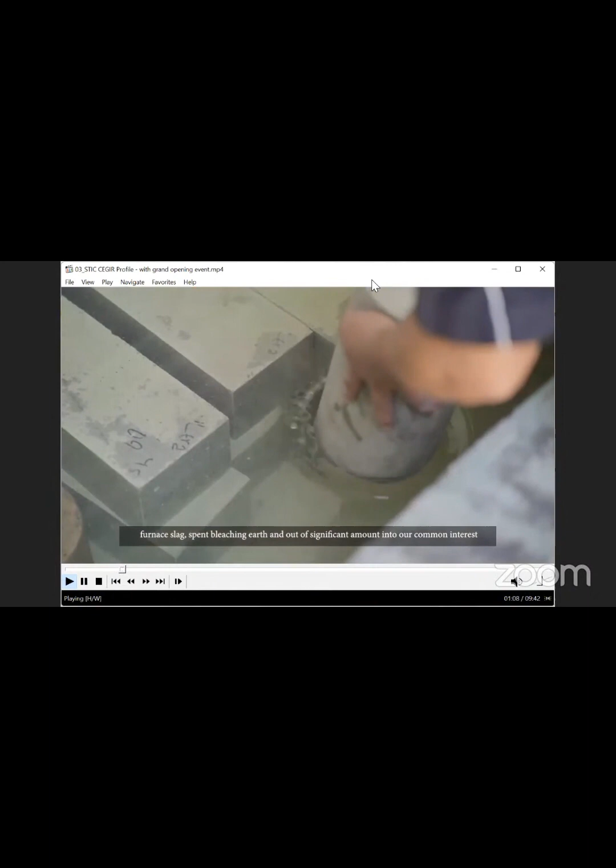The center is set up among Taiwan Tech, ITS, and Widya Mandala Catholic University, Surabaya. The main goal of the center is to strengthen cooperation on science and technology between Indonesia and Taiwan, and we will focus on recycle and reuse of industrial waste. Targeted compounds include fly ash, furnace slag, and spent bleaching earth that are of significant amount and to our common interest. It will also involve 1,400 strong alumni in Indonesia, and we will engage private sectors, NPOs, and research institutes.

Through this international collaboration, Institut Teknologi Sepuluh Nopember could strengthen the collaboration between National Taiwan University of Science and Technology, Widya Mandala Catholic University, and Indonesian Institute of Science. This research center was developed as a platform to connect the researchers from different universities from ITS, Widya Mandala, LIPI, and NTUST with the experts from industry that work together to have the research regarding the eco-green solution and for the circular economy and sustainability.

Waste utilization is one of the implementations of eco-green solution, and we know that Indonesia could develop this model to recover the waste and use it for many different purposes, and also we can develop a good impact to the environment and also to the society.

We are proud that ITS, the Institut Teknologi Sepuluh Nopember, Surabaya, Indonesia, has been a part of this prestigious international collaboration. The topic of circular economy and green innovative resource matches with the ITS vision and the world focus. So I believe that the research center opens opportunities for researchers to expand the outcome, the connection, and also the international collaborations. In addition, it boosts the ITS contributions to the nation.

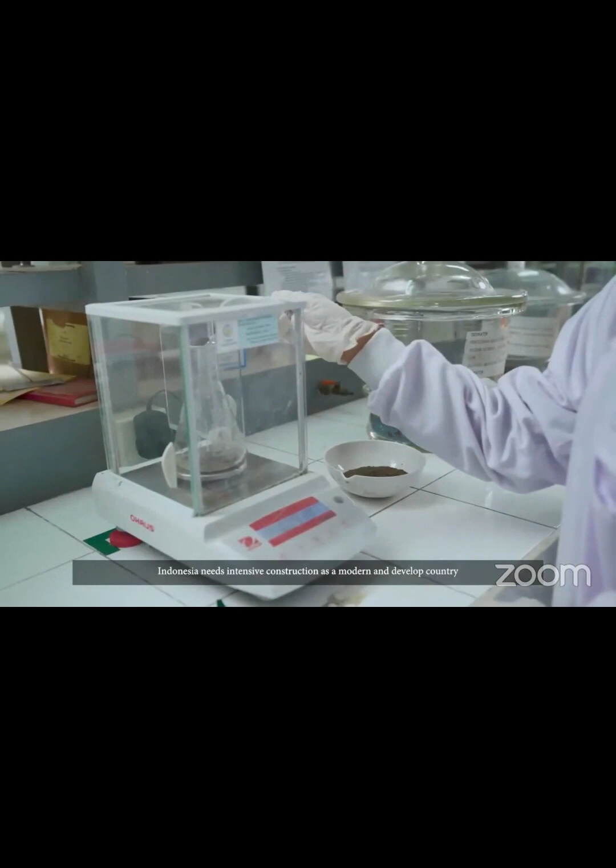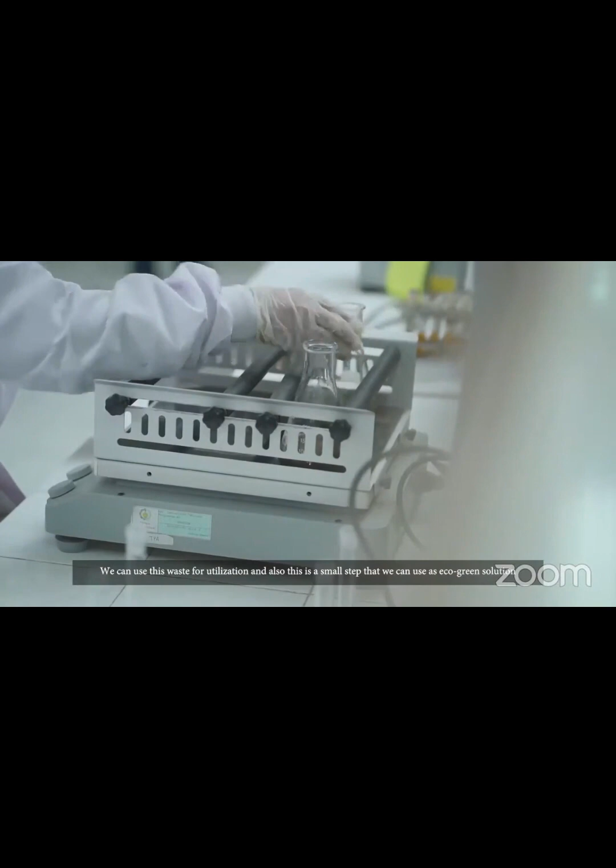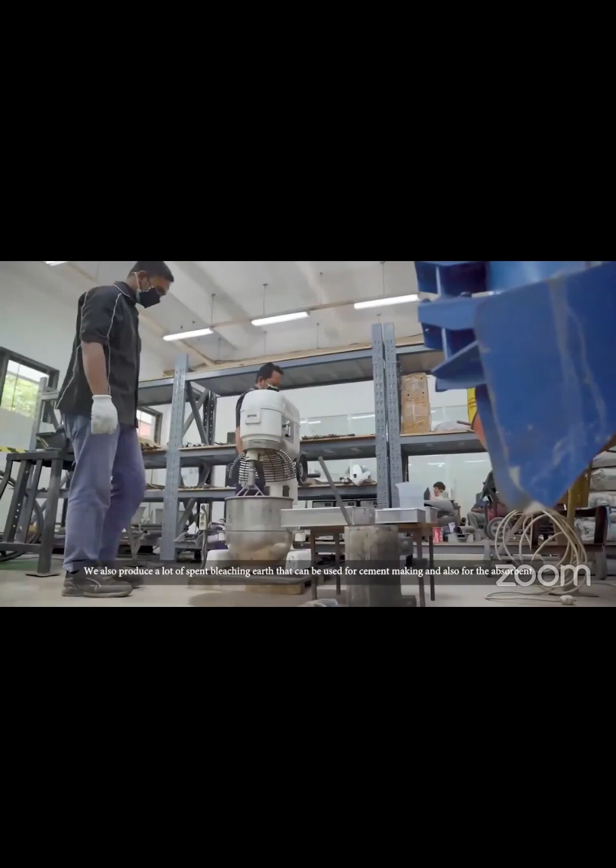Indonesia needs intensive construction as a modern and developed country. And we know that the source of waste, especially industrial waste, is abundant in Indonesia. We can use this waste for utilization, and this is a small step that we can use as an eco-green solution. For example, we have produced a lot of fly ash and slag that can be used as a cement additive and also for construction. We also produce a lot of spent bleaching earth that can be used for cement making and also for the adsorbent.

We already structured the STIC roadmap based on our goal, which is circular economy and green innovative resource. In the first year, we established a platform for the collaboration of industry, academia, and government administrators. It is followed by a data bank of experts to support potential collaboration and capacity building in the second year. And in the third year, we focused on expanding this collaboration as well as capacity building through seminar, workshop, and exhibition. STIC CEGIR also cooperates with the Ministry of Science and Technology Taiwan and Taipei Economic and Trade Office as Taiwan representative in Indonesia, who fully support this center.

The Science and Technology Innovation Center raised two main issues, namely circular economy and green innovative resource. The goal of this center is to strengthen the cooperation on science and technology in line with the New Southbound Policy of Taiwan government.

Be better together. Together, be greener. Thank you.

Welcome to the Policy and Implementation of Circular Economy, Challenges and Opportunity 2021 Virtual International Seminar in conjunction with the virtual opening ceremony of Taiwan Indonesia.

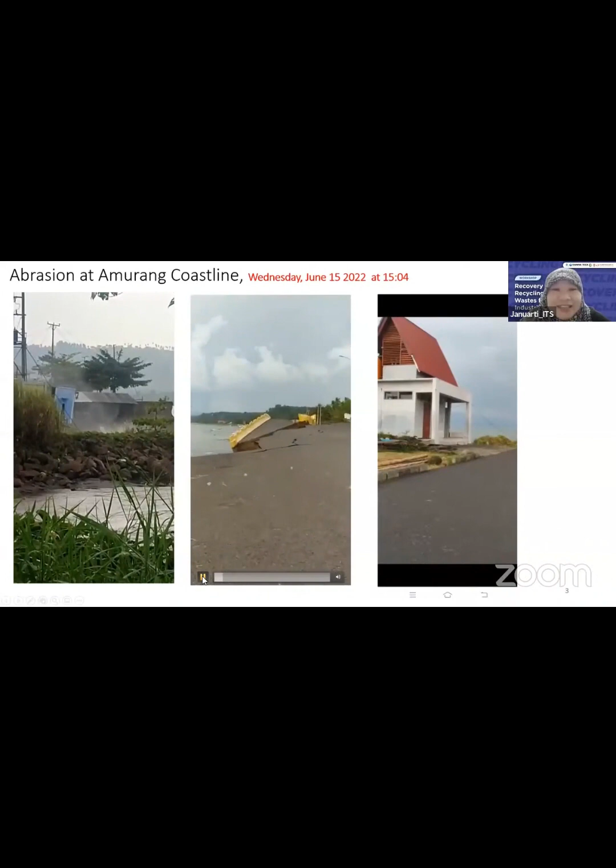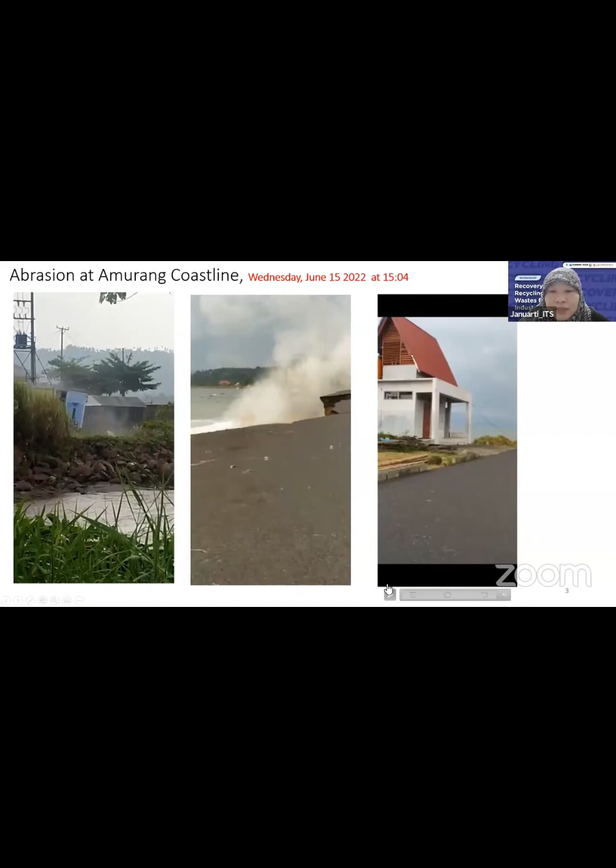The abrasion is very severe, but some parts can be safe because of very limited protection, and it is still okay. Next, in this video we can see a house collapse. The sound is off because too many people scream, so I turned it off. And here is the Amurang Bridge. Where is the protection? The bridge was built without any protection from the sea. It's unbelievable. And another one, just going on like that. What should we do?

Then this is what we are concerned about, not only in Indonesia but also in the world. We know that mangrove is the back protector for our coastline. The situation of mangroves in Indonesia is in very bad condition. And we know that mangrove is a mainstay of CO2 capture. We have to rely on mangroves because it's a very important forest.

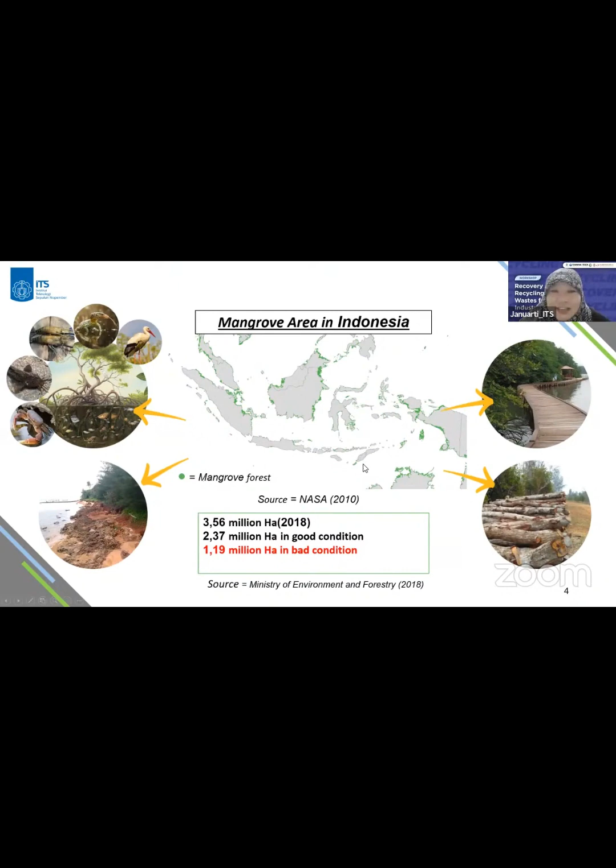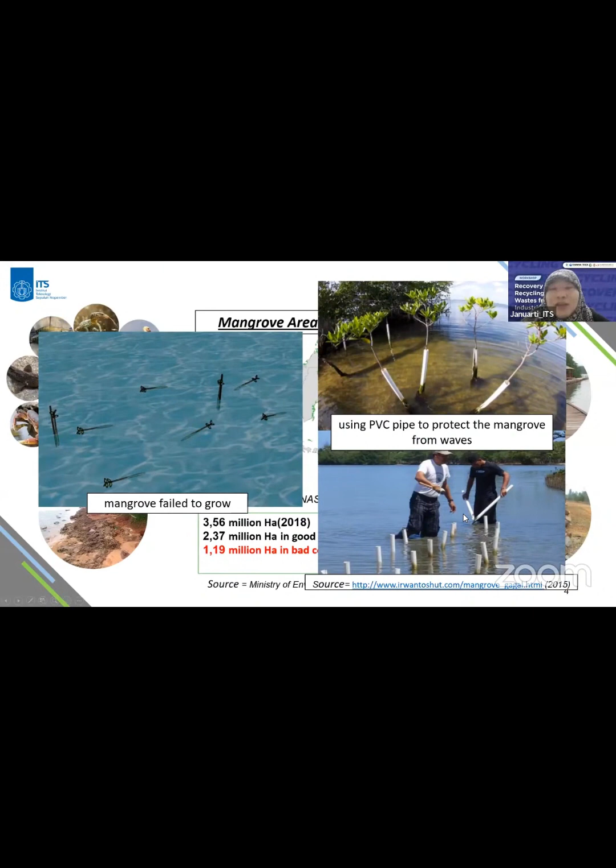The problem here is that the mangrove saplings are not planted in the correct way. They use PVC pipes to protect the mangrove saplings from the waves, and it fails like this, and all the saplings were washed away by the current. We can see again and again they try to plant and fail, plant again and fail. We lose a lot of energy because of that.

And this is from the Ministry of Environment, in collaboration with another ministry responsible for revitalization and rehabilitation, showing the mangroves in very critical condition. We have to maintain, plant, and educate the people. For mangroves in good condition, we have to protect and utilize them in balance.

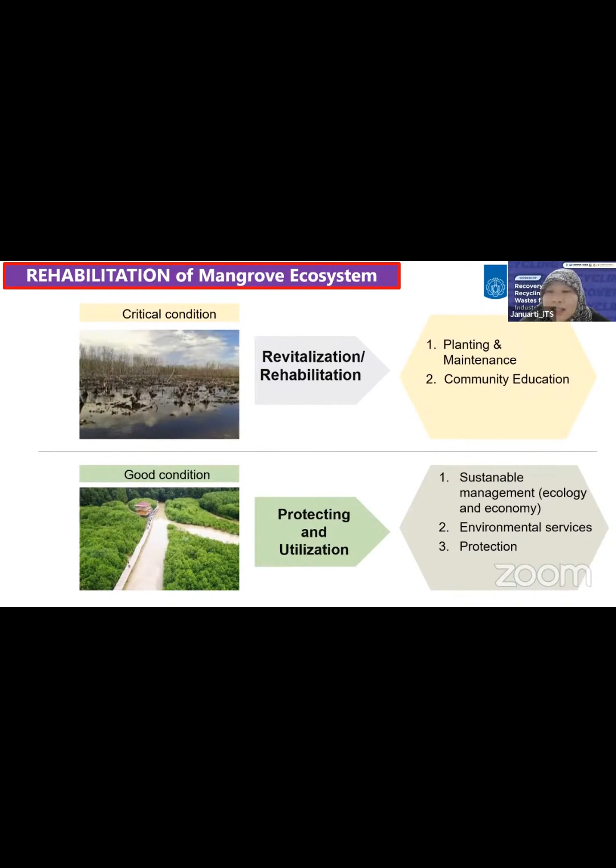This is the condition of mangroves very near our campus in Wonorejo. We can see here many failures of mangrove planting in the east coastal area of Surabaya city. Why? Because we don't have good education or good management of the planting system.

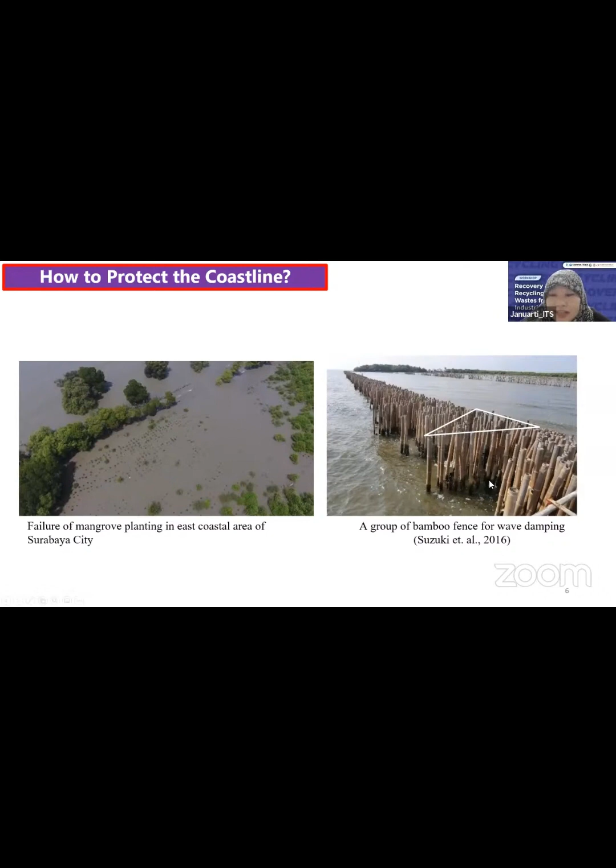This is just a video from the drone, 2 years ago. Yeah, this is, we can go there. I think maybe Professor Liu can go there to see and enjoy the scenery in Wonorejo, very near to ITS.

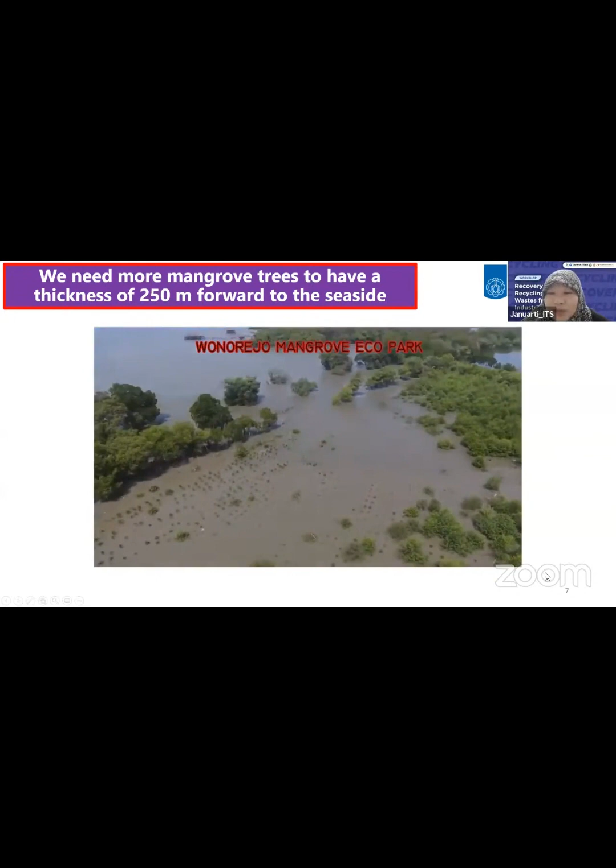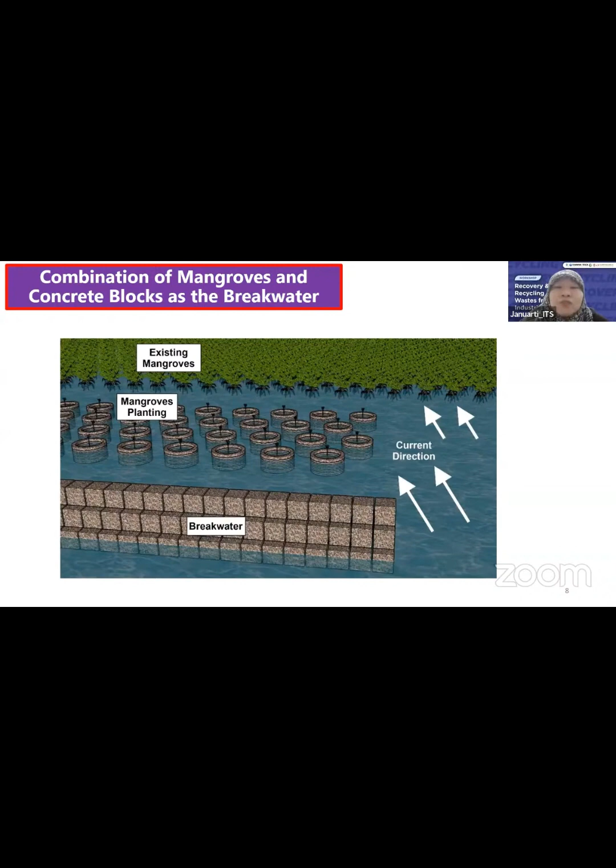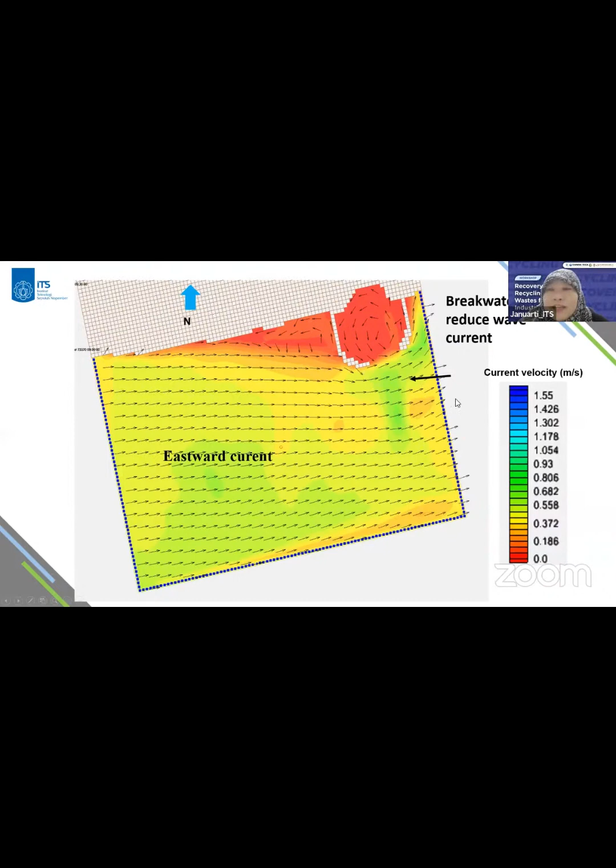We made simulations here of the eastward current very near Surabaya, with the north side shown. In the simulation we put a very small barrier here, a breakwater, and you can see the current velocity, where red means 0, no current velocity. So by constructing a very small breakwater here, we can see the current that was very high can be reduced to 0. This is the idea to put some breakwaters using fly ash and bottom ash to protect Surabaya from abrasion. This is our research and our recent applications at ITS.

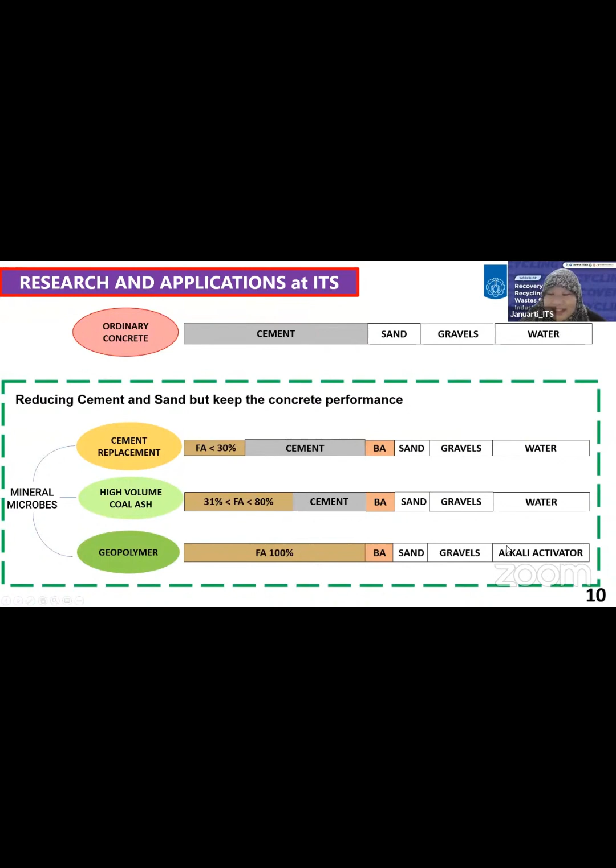Talking about the difference between geopolymer and conventional concrete, we use fly ash 100% to replace cement, and we use alkali, usually sodium or natrium, to replace water. As usual, we combine bottom ash and sand together with gravels to make the concrete.

The appearance is the same, the workability is also the same, and the mechanical properties are also the same.

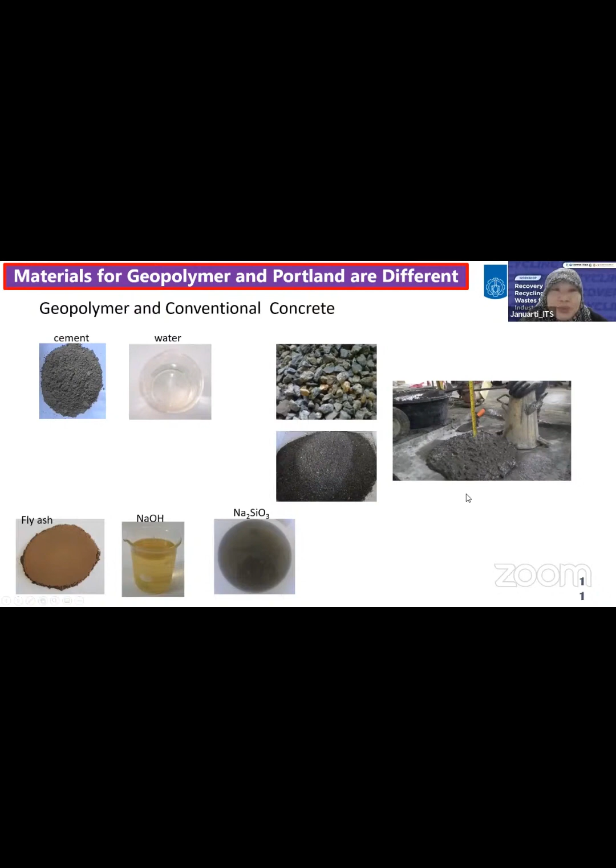But talking about durability, geopolymer is a super material. It can resist acid, it can resist chloride penetration, it can resist blasting load, and it can also resist fire. So we can use this kind of material for fire protection.

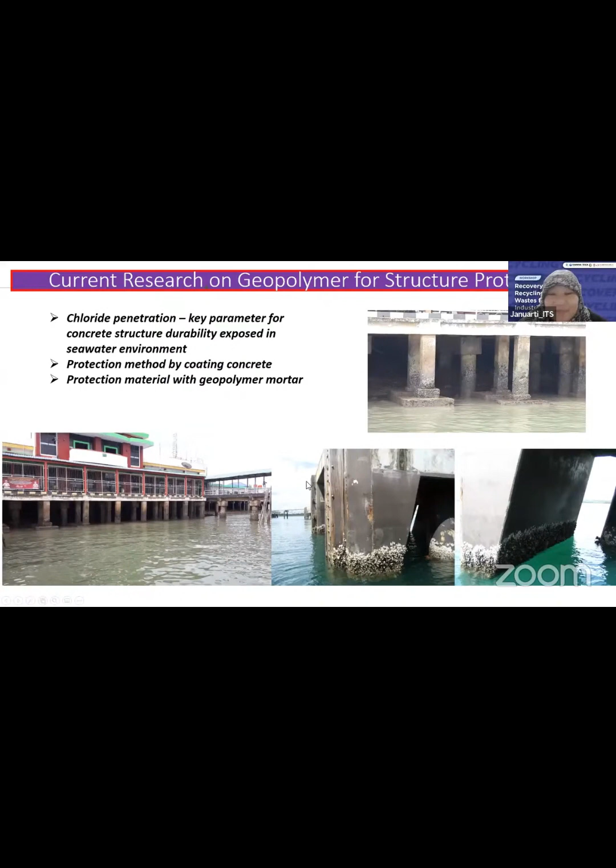So what should we do with this structure? We know that fly ash and bottom ash have a lot of benefits for structures, especially to increase durability. Especially if we use geopolymer 100% to replace Portland cement with fly ash, it can enhance structure durability.

This picture was taken at one of the pile locations in the Suramadu Bridge at Madura Strait, East Java. You can also see a lot of barnacles or biofouling attached to the piles. And we put our specimens very near here.

We put our specimen, our geopolymer concrete, near the piles. Of course, this pile was made from conventional concrete, but we placed our geopolymer specimens very near to it. This is the location, and ITS is around here.

Here is the result. This is the maximum free chloride ion, standardized by our Indonesian national standard to control how much free chloride ion can be found in the concrete, and this is the maximum allowed.

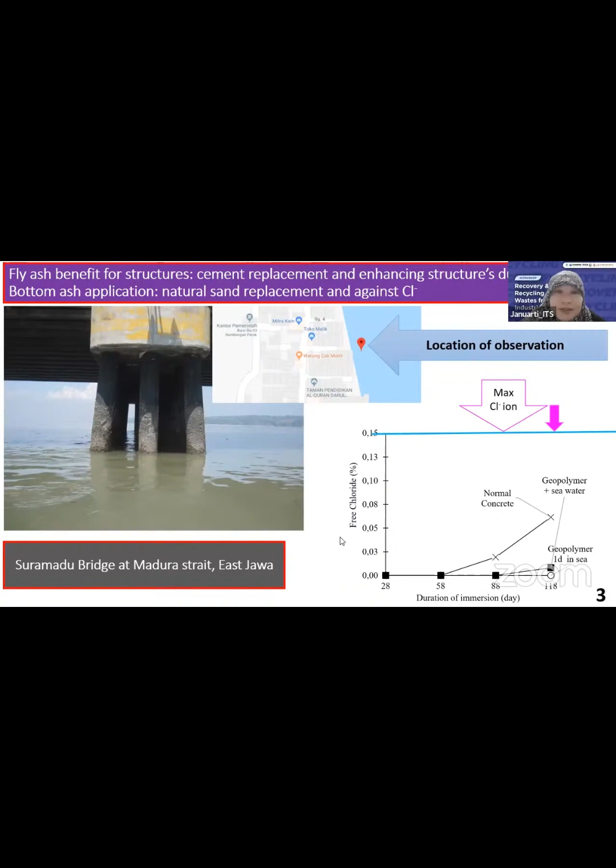So this is the big difference in durability between normal concrete and geopolymer, how different normal concrete is from geopolymer. All right, now I come to the conclusions, because I was given very limited time.

As we can see here, for the green belt of the Indonesian coastline, fly ash and bottom ash have contributed to many areas. They have a lot of benefits for our infrastructure in coastal areas, and both fly ash and bottom ash can be used as potential materials to immobilize chloride ions and protect our structures from corrosion. Again, mangrove as a living barrier can be combined with concrete blocks as a breakwater for coastal protection.

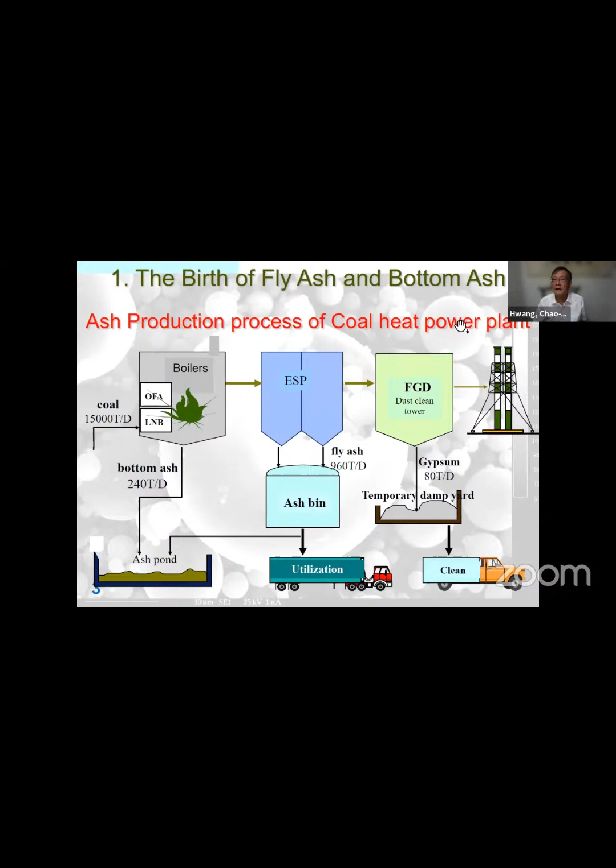Looking at the DNA is very important and useful, because the DNA of fly ash or bottom ash is a calcined clay. This ash is actually an impurity in coal—materials like iron sulfide, clay, and quartz. Under high temperature this becomes very active, so no wonder it's been used widely in the world as a pozzolanic material. It's a kind of supplementary cementation material. Looking at this, you see the replacement—but it's not only to replace cement, it can be used like a geopolymer, which is a very useful material. So the DNA of this material is pozzolan, which has been used for more than 2,000 years.

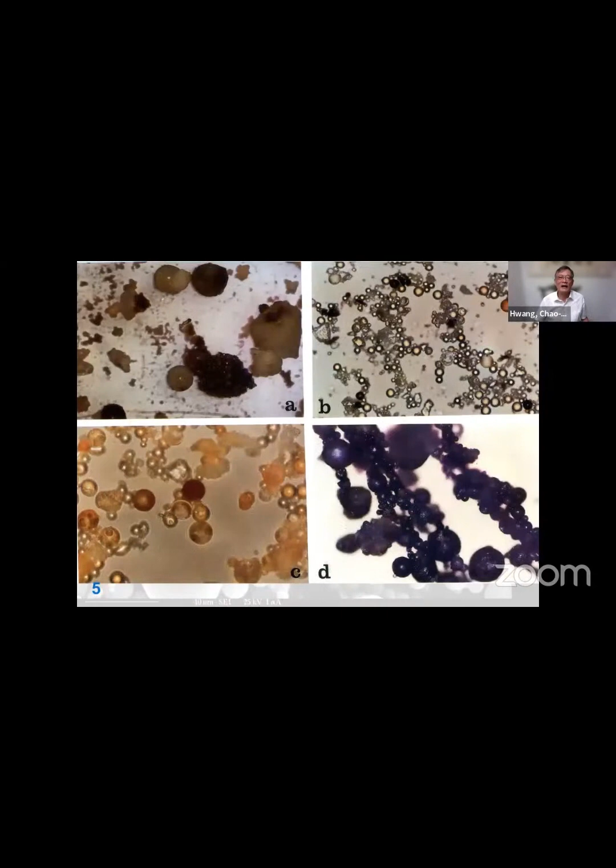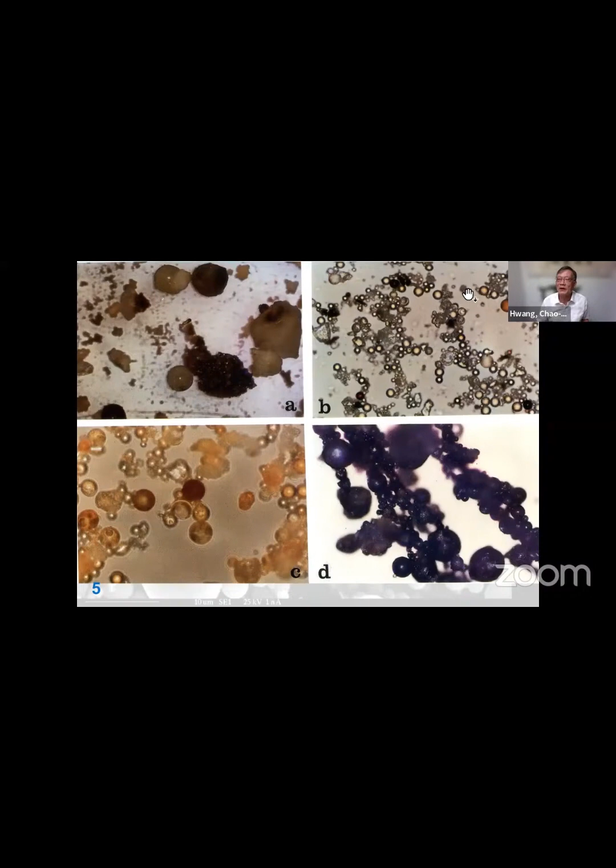Next, looking at the physical shape, fly ash looks just like beads of different sizes. This different size is actually a gradation, which is very important. This shape aids the workability of concrete, because concrete is not only about producing concrete but we need workability for construction. This shape is very good for workability because it's like a ball bearing, making concrete easy to construct. So you can reduce water, and also reduce some superplasticizer needed, for making high flow concrete.

Next. There's also some burning issue—if we don't grind the coal very fine, there are some monolithic particles that become unburned carbon in fly ash. This unburned carbon can actually reduce workability. Normally for fly ash, we use a grinding method to grind the particles and release the small particles. This small particle is very active, just like silica fume.

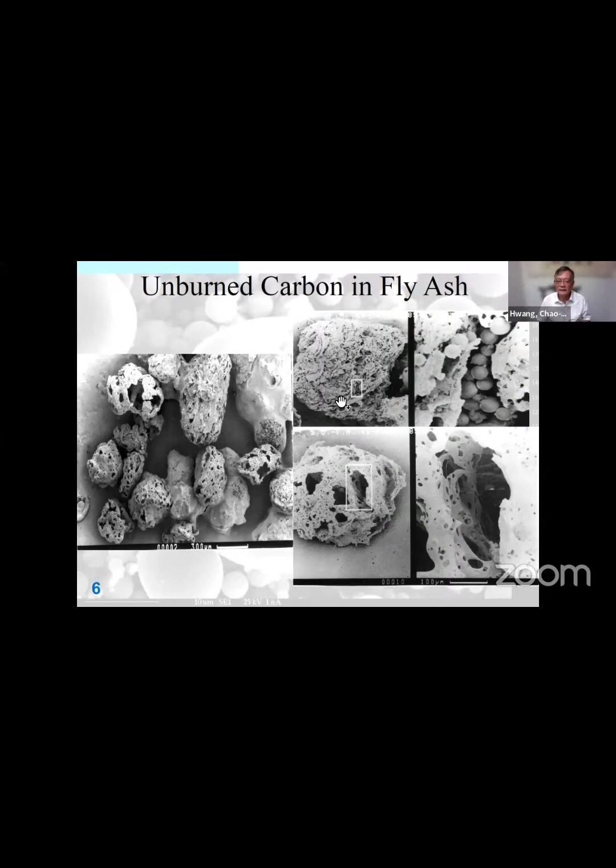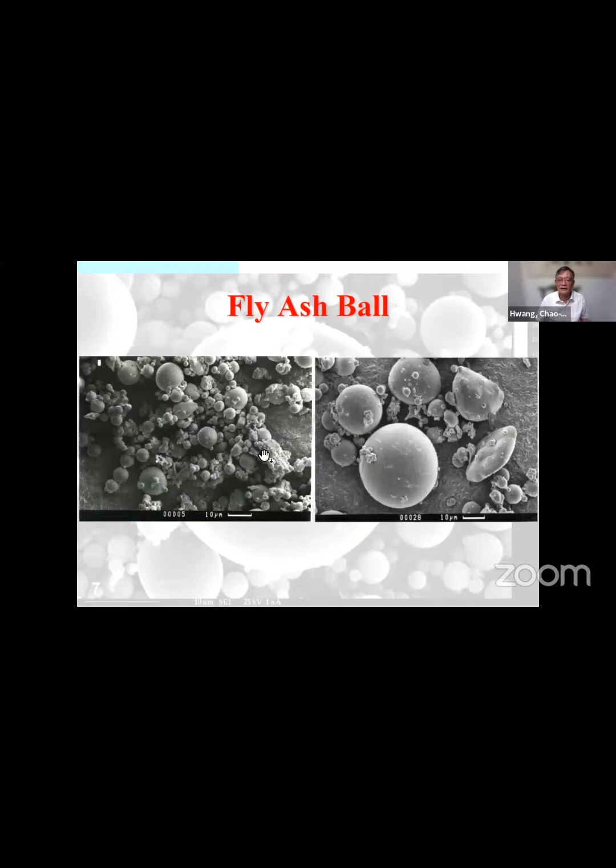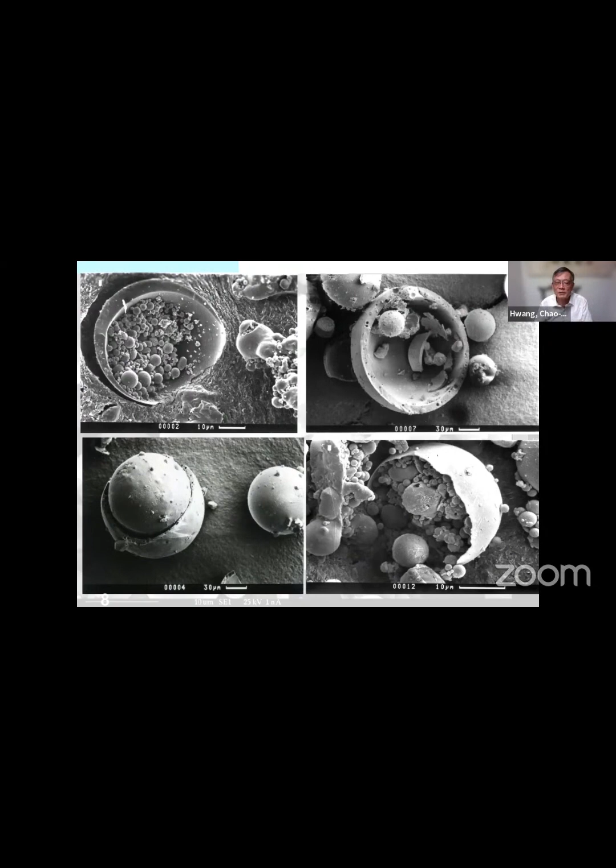Next. Looking at the size, it's about 10 microns here. The size can range from 30 microns down to 1 or 2 microns—even smaller particles exist. So fly ash, the small particle, can be used as a fire resistant material. In Taiwan, it's been used for high insulation materials. Those particles in the big spherical ball contain a lot of different sizes of fly ash particles. After grinding, you can release a lot of very useful fly ash particles, which aid workability and reduce the cement required.

But in Taiwan, we use a different method, which I will mention later.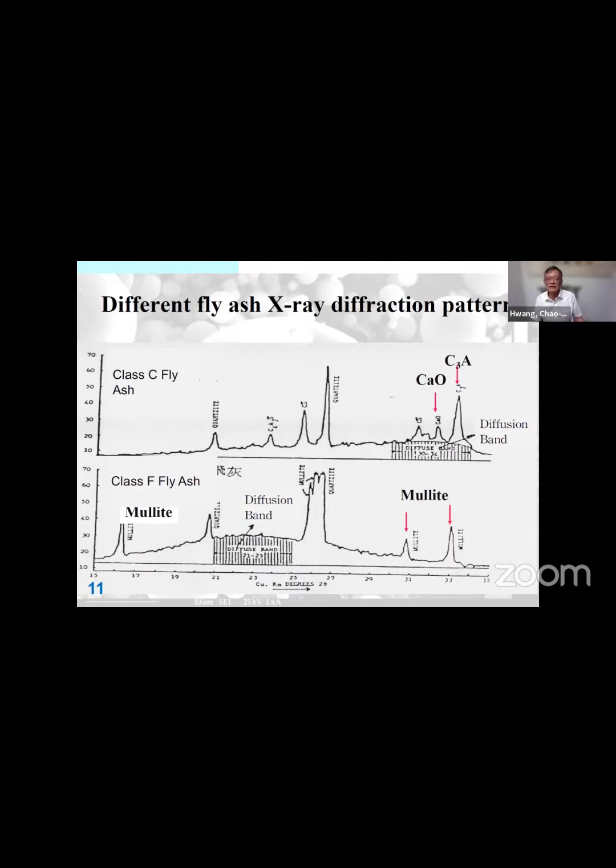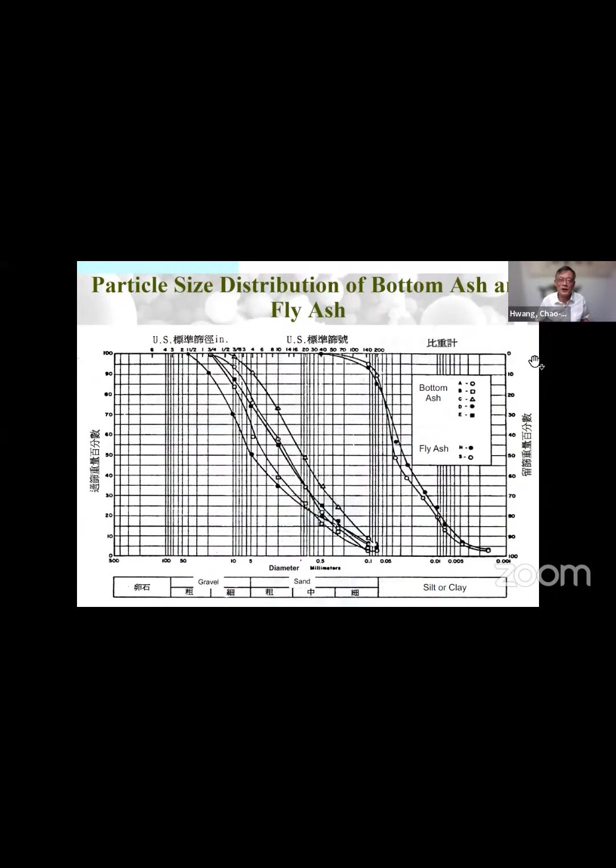Looking at the particle size, fly ash has small particles and very good gradation. Looking at this, they can be used to replace cement or replace some sand. Looking at the bottom ash, the particle size is larger, and this can replace part of the sand.

So how does this work? This fly ash as a pozzolan-like material should be stimulated by alkali, either by external alkali or sodium silicate or other materials, to stimulate the reaction, so that this kind of ash can become very useful.

So why is this material useful and durable? Looking at the Colosseum or the pyramids, they contain a lot of volcanic ash with lime. They were able to build the Colosseum to last more than 2,300 years. Nowadays, fly ash is just like volcanic ash—if we stimulate it with alkaline material, it can produce very long-lasting, durable material.

So we use this antique method. Fly ash can also be used like in the pyramids—they used a geopolymer. We use fly ash and bottom ash by adding sodium silicate and sodium hydroxide to stimulate the reaction, just like the Great Wall, which is more than 1,000 years old. They used lime, rice ash, and lime putty to make the concrete long-lasting.

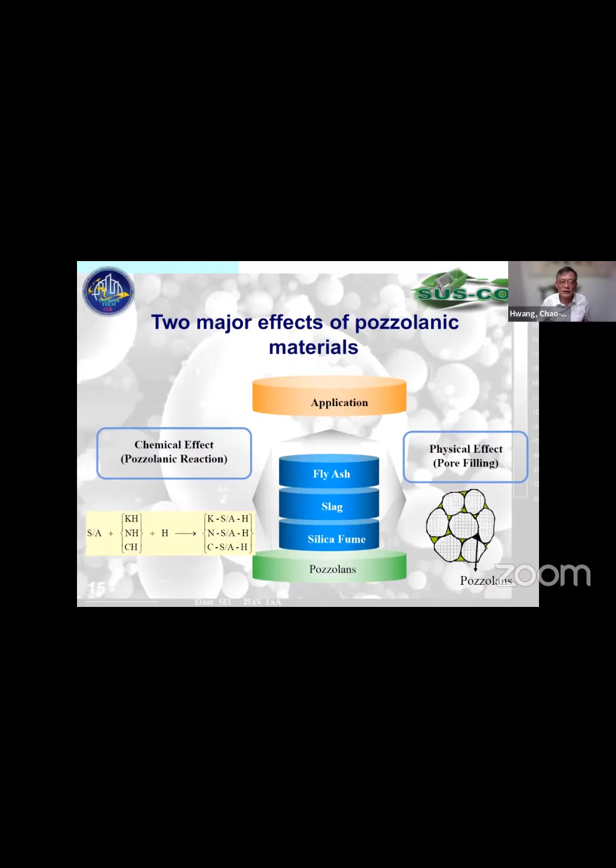What we are doing in Taiwan, I developed the system. I think there are many Indonesian students, my students or Vietnamese students, I instruct them how to do this. We use a filling method, backfill or forward filling.

So we decide the property of the material and measure the maximum unit density. We put fly ash into sand to measure the heavier, denser material, so it can physically densify. The system becomes very strong. Then we find the void, and design what kind of property we want.

You want durable concrete, anti-corrosion concrete, or ultra-high strength concrete, we design the strength. Then we use superplasticizer to aid workability, making the concrete flow without segregation. So we have very good durable concrete.

So on the top right you will see SUS-CON. Actually what I'm doing from year 2012 to 2020, I engaged in a European Community project doing this. This method can also be used for alkali-activated concrete, using a geopolymer method.

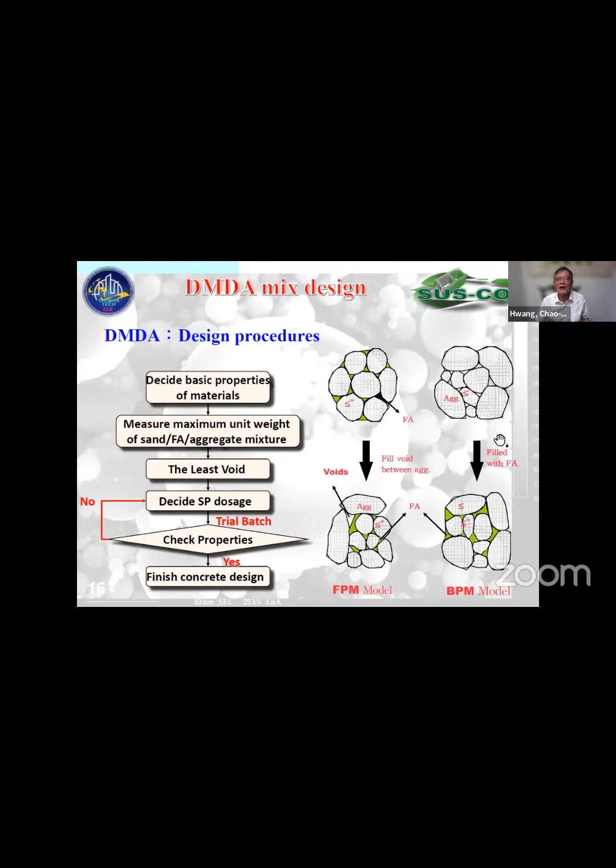Next please. So concrete becomes user-friendly with fly ash. If you only use cement, it becomes very stiff, and the superplasticizer will lose its mighty power in 60 or 90 minutes. But with fly ash, the concrete can last 2 to 3 hours, still flowing.

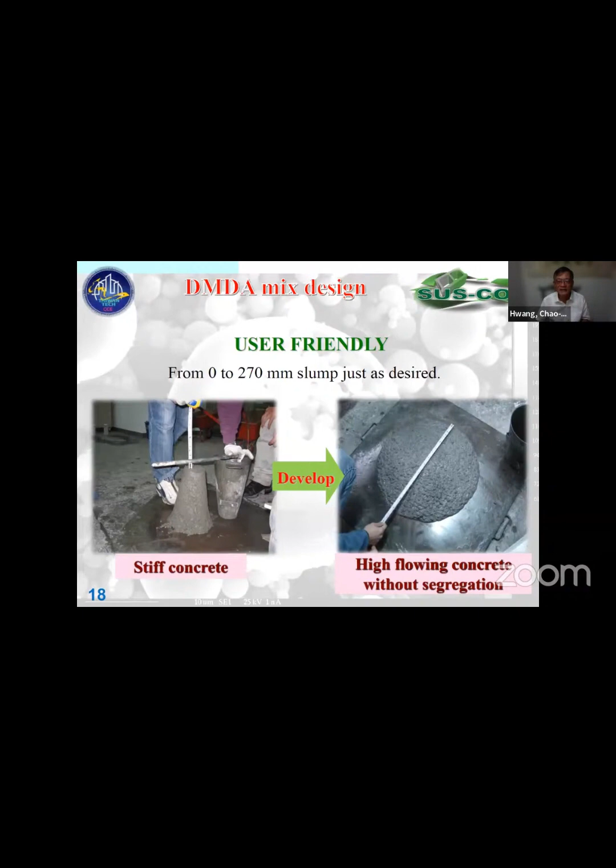Conventional concrete is very stiff, but we can design the concrete slump from 0 to 270 millimeter slump, just as we design. So you can design the desired flowing concrete with fly ash or bottom ash.

The following project I did, I think from 1983 to 2020. The real practice use of coal ash in Taiwan since 1983, the skyscraper, this is the first project. I mixed the cement with fly ash because people were worried that using fly ash would lower the strength, so I tried to prove and give them evidence by engaging in this project.

The project is 56 MPa concrete for the 85-story building. It's a high strength, high performance concrete, in year 1994. Then in Taipei 101, year 2000, the strength is 70 MPa. If you visit Taipei, you will see the high-rise building, the tallest building in Taipei City, that is Taipei 101.

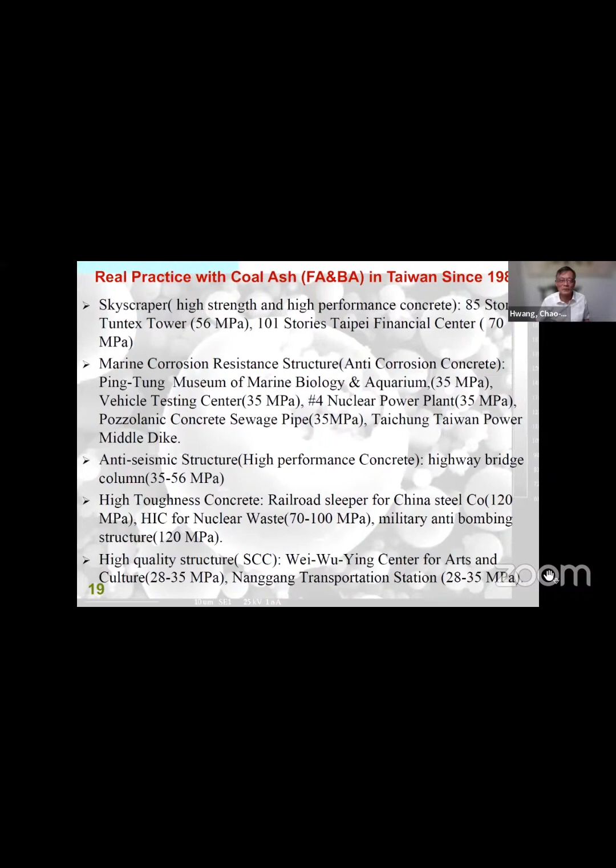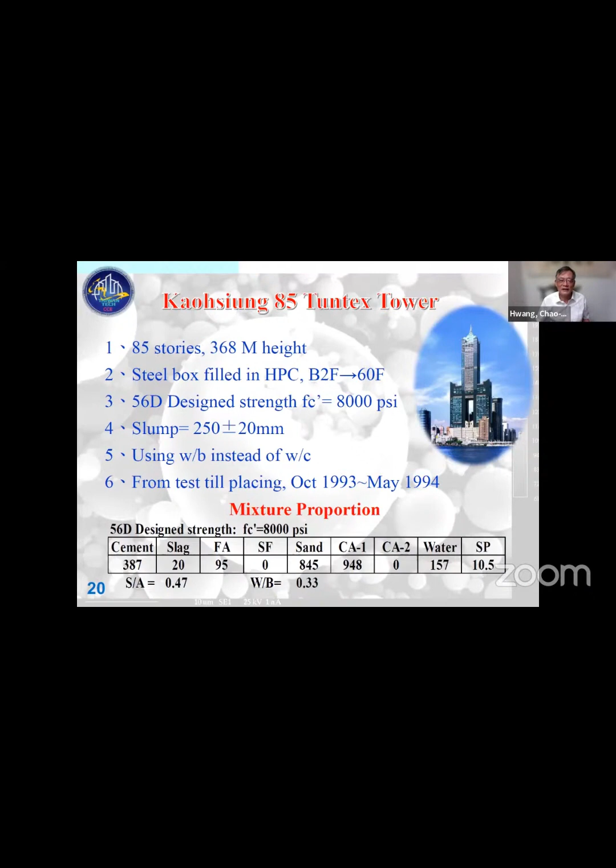Next please. That is an example of what we are doing, and I also show some recipes, but this recipe is already old. Now for cement at 387 kg per cubic meter, I can produce 17,000 PSI concrete, because I can save about three-quarters of the energy and CO2 emissions. So the results I show here are from 1983 to 1994.

And the Museum of Aquarium, okay, Marine Biology Aquarium. So that used 290 kilograms of cement. Normally, for this kind of 5,000 PSI concrete, they need more than 300, or 500 kilograms of cement. So you can see that this concrete only uses less than 50% of the cement. Not only do we use it to replace cement, but we fill the voids of the sand, so it can contribute major strength.

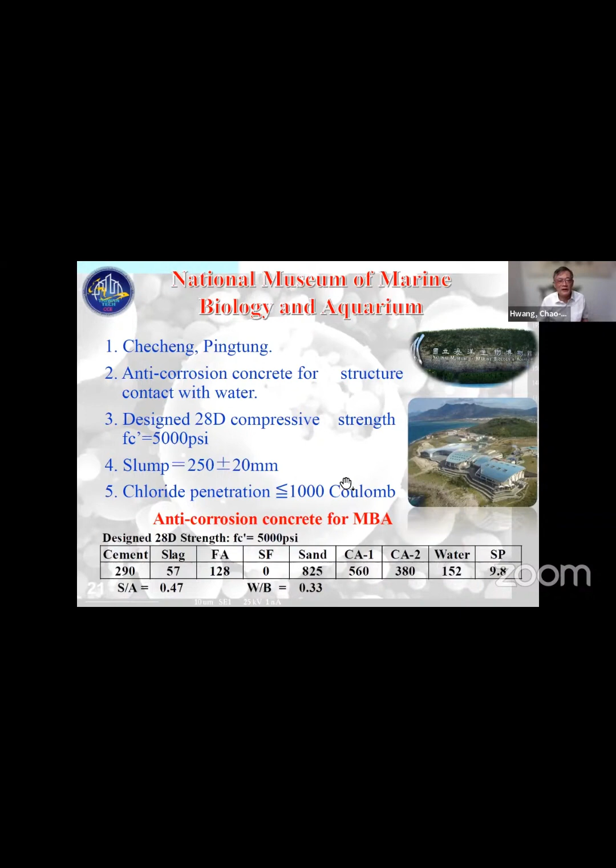So if you look at the roof in the middle of the right-hand side, you will see that the roof also uses this kind of concrete. Okay, so in this concrete, we specify the chloride penetration at less than 1,000 coulombs. That is very important for durable concrete. Next, please.

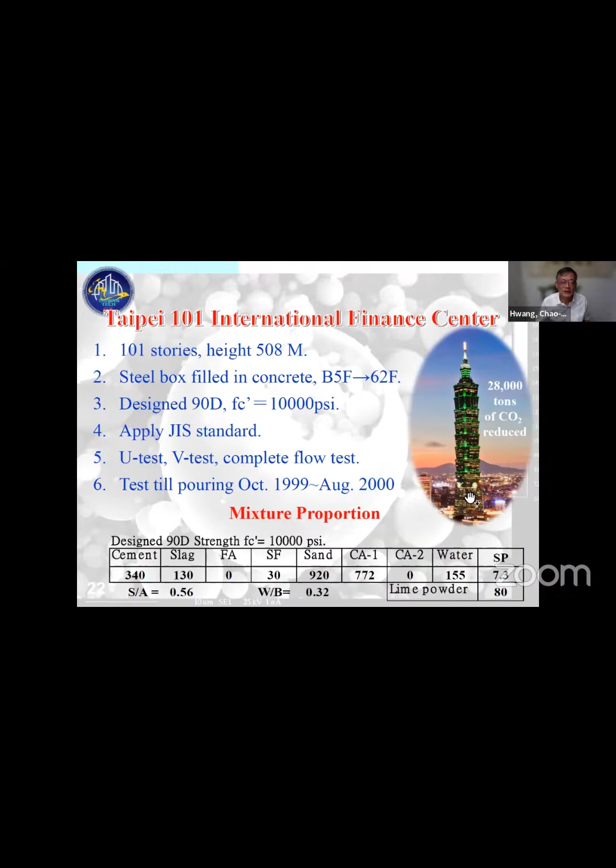For Taipei 101, you will see here it looks like fly ash is 0, but actually in the end product we use a lot of fly ash and some silica fume. Silica fume and fly ash actually have different particle sizes, but it can be used. So that was in year 1999 to 2000. Next, please. And Nanggang, that is also 4,000 PSI and 5,000 PSI concrete. Next, please.

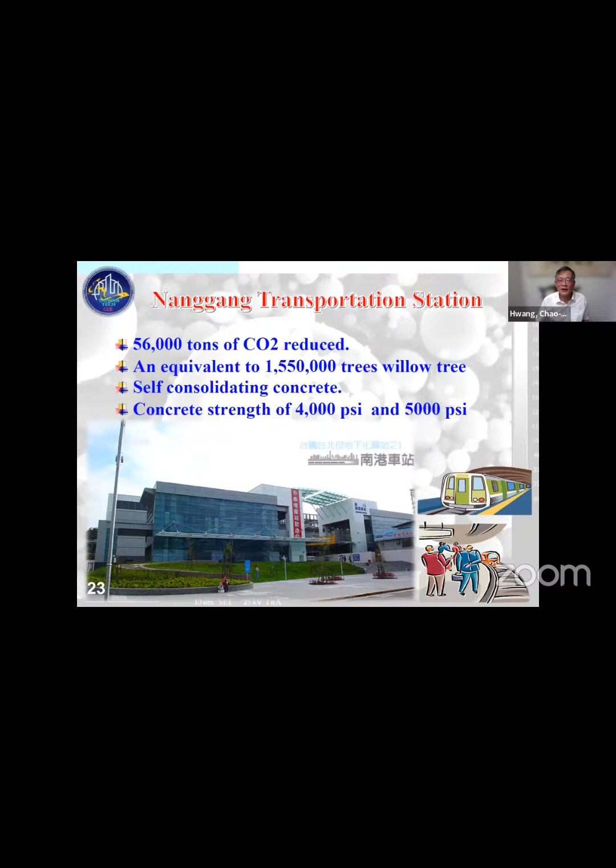And Wei-Wu-Ying is 4,000 to 5,000 PSI concrete. This building got the golden award from the government. Next, please.

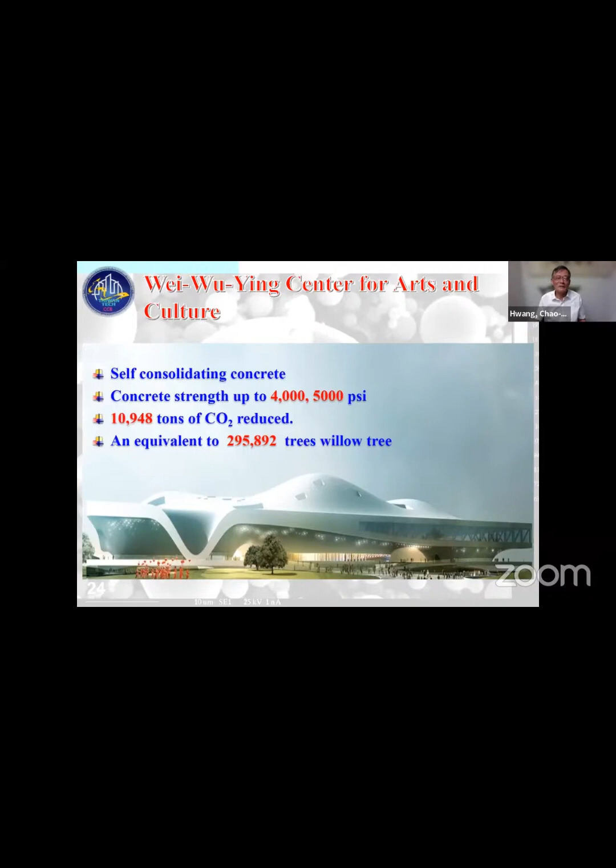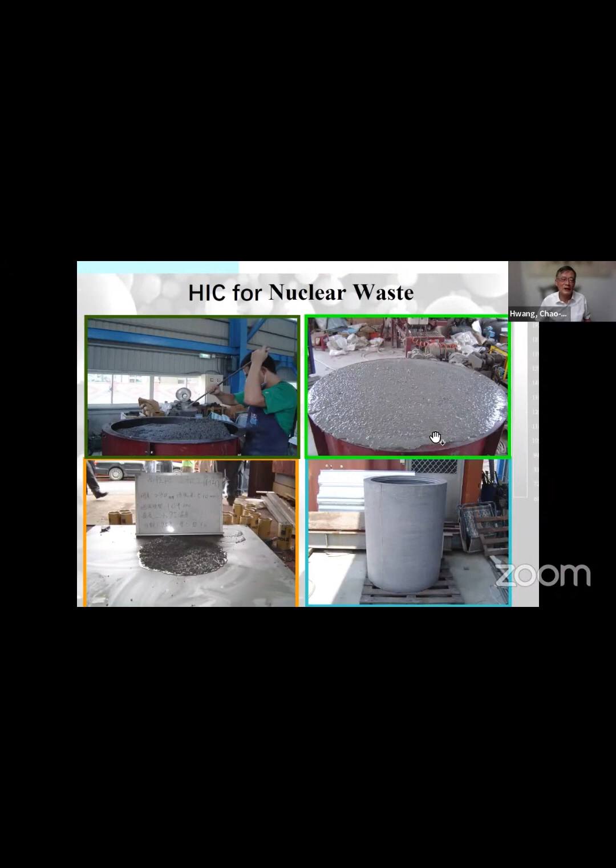And for the high integrity container for nuclear waste, you will see that we made this concrete. Its high strength is 17,000 PSI. It uses water of about 120, a very, very small amount of water, because we try to reduce shrinkage. And we add a large amount of steel fiber. So the concrete looks like this outside. They put the waste into the container and cover it. Then we can keep it for more than 300 years. Next, please.

Well, the coal ash application for low work, for energy saving and carbon reduction, is very important, especially I think in the future in Indonesia. You can build the city, intercity and countryside using all this material, and that could be quite useful. And we already promote this technology in mainland China. Next, please.

And this one is in Taichung, in Changhua actually, for the ash pond. So we use bottom ash and fly ash, and we use a controlled low strength material. And they save a lot of money, a lot of money. Next, please.

So this high flowing fly ash and bottom ash controlled low strength material, in Taiwan now, we have a green material label because it saves at least 50 to 60% of cement. So concrete flowing like this one can fill the sewage pipe. And this is very common use in Taiwan. Next, please.

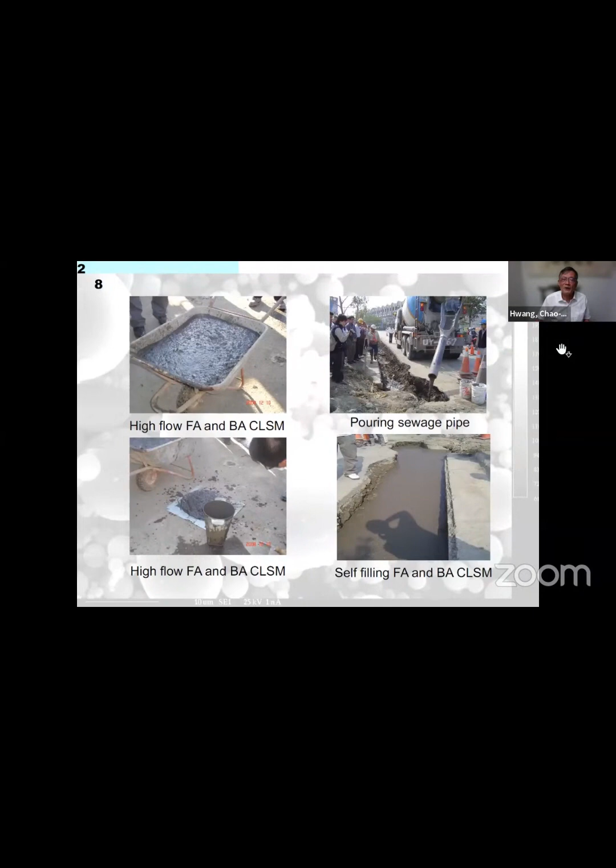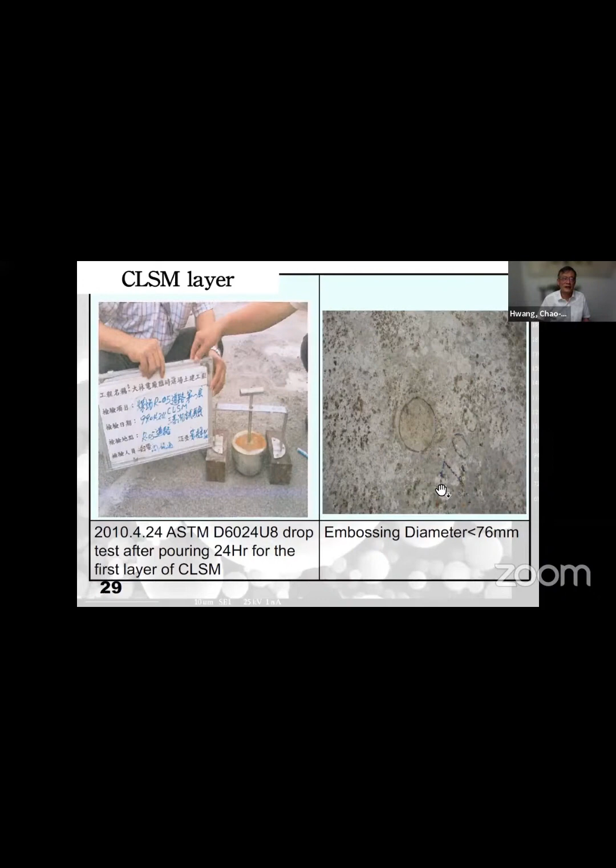So in Taiwan Power, in year 2010, we also used it for the pavement, for the road around the power plant. So we used CLSM, and we checked the quality. Next, please. 2 days later, we used a roller to roll the road. And then the CLSM has no cracks, so the surface is good. Traditionally, for a road, gravel aggregate is put in there, and the road will crack or have some problems, but using CLSM, you modify the land, the ground. So this CLSM just looks like soil, but it's better than soil.

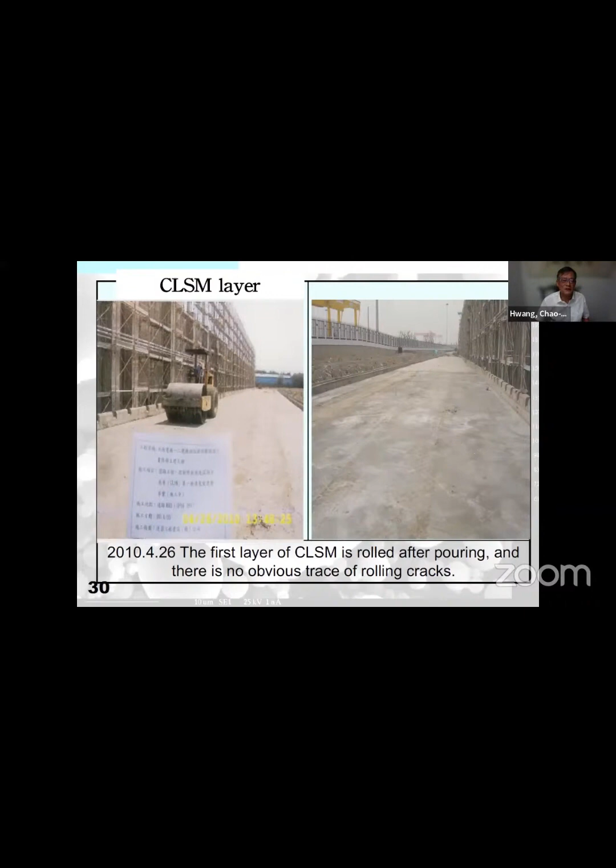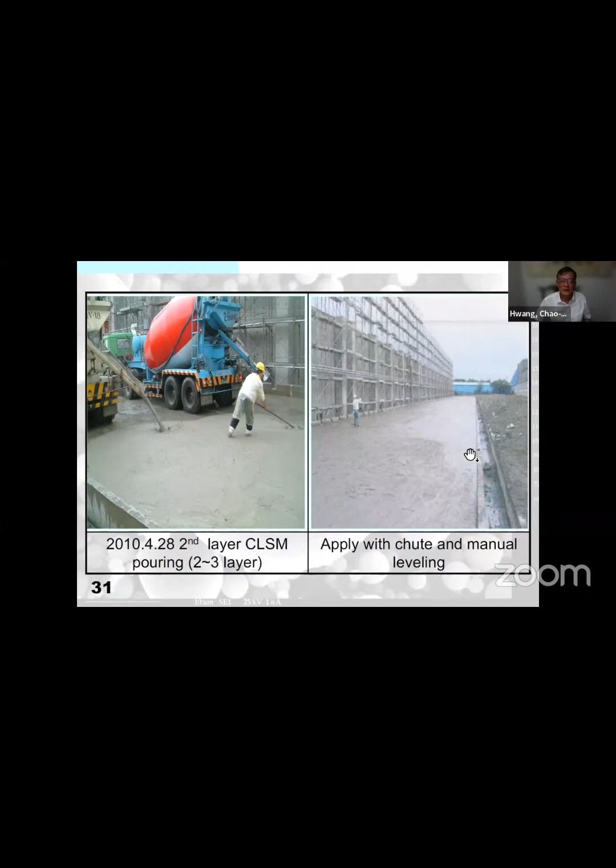Next, please. And 2 days later, we pour the second or third layer and level with manual leveling, or you can use an automatic machine to level the surface. So that looks very good. And the result now, till year 2022, is still in very good shape. Next, please.

If we don't try to reduce CO2 emissions, the greenhouse effect causes disaster: typhoons, monsoons, forest fires, and drought all over the world. I think now they have a big problem. So we try to save energy, save the earth. We should use a lot of this bottom ash and fly ash to try to reduce cement usage. Next one, please.

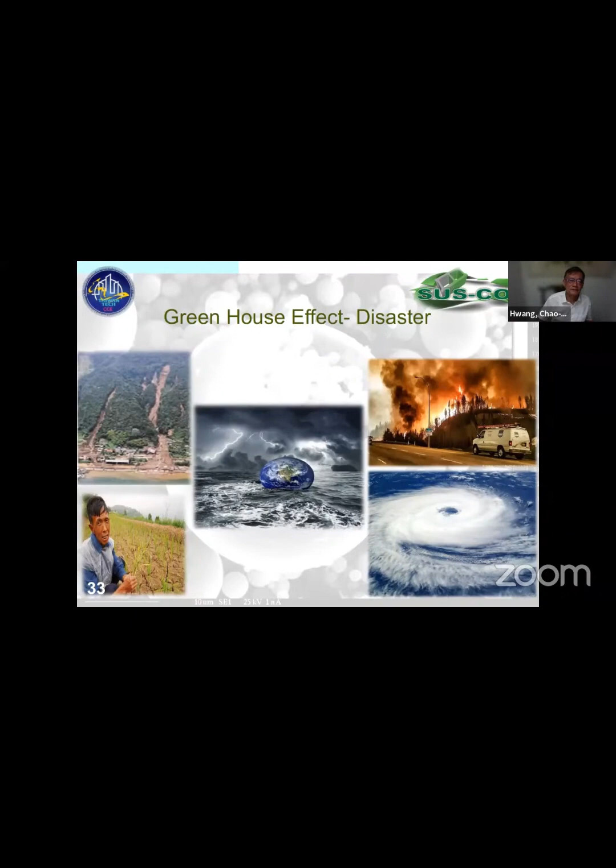Next, please. Okay. Well, we know that 1 ton of cement will emit 0.85 tons of CO2 and consume a lot of electricity and fuel. Okay. Next, please.

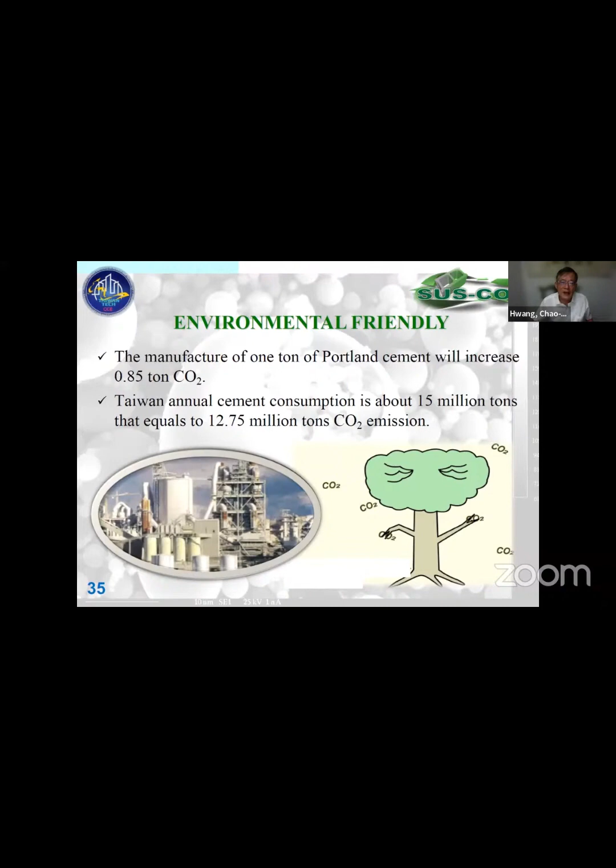So with this one, we try to use less cement, so it can become an environment-friendly material. So fly ash and bottom ash provide a chance for us to use it. Next, please.

So how do we make concrete durable without fly ash and bottom ash? Actually, the building cannot last longer. Because I have a lot of experience with slag: only using slag, you have a problem. Only using fly ash is also a problem. So I usually combine these two together, and so the fly ash becomes a kind of shell. So this lime and pozzolan can make the concrete sustainable. Next, please.

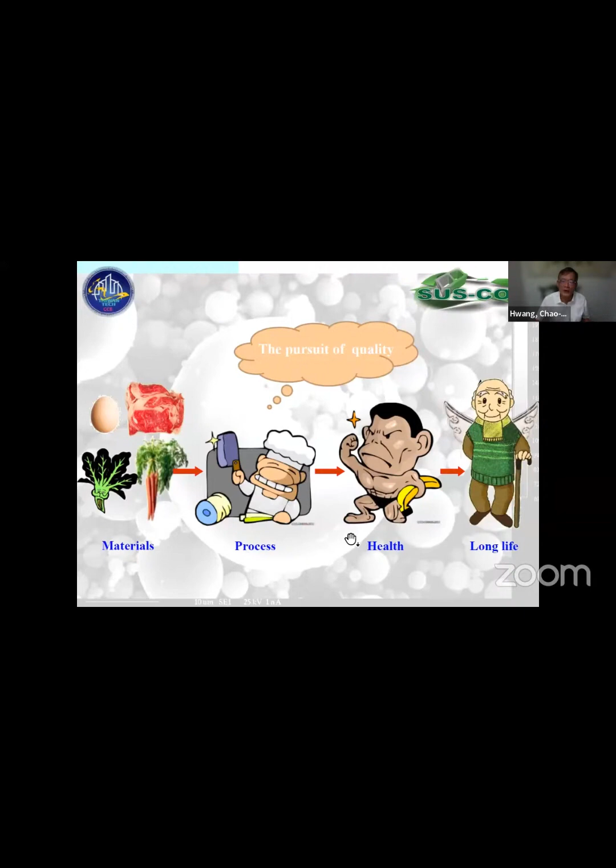So if we pursue high quality, the material is very important. So the fly ash and bottom ash material and process are important. We not only need a very good design of the recipe, but we also need a very good process, like a chef, to process this and make concrete healthy and long-life. Next, please.

Durable and sustainable. If there is a lot more cement paste, the durability will reduce. So we try to use fly ash and bottom ash to reduce the cement paste and increase the durability from the fresh stage to the hardened stage. Next, please.

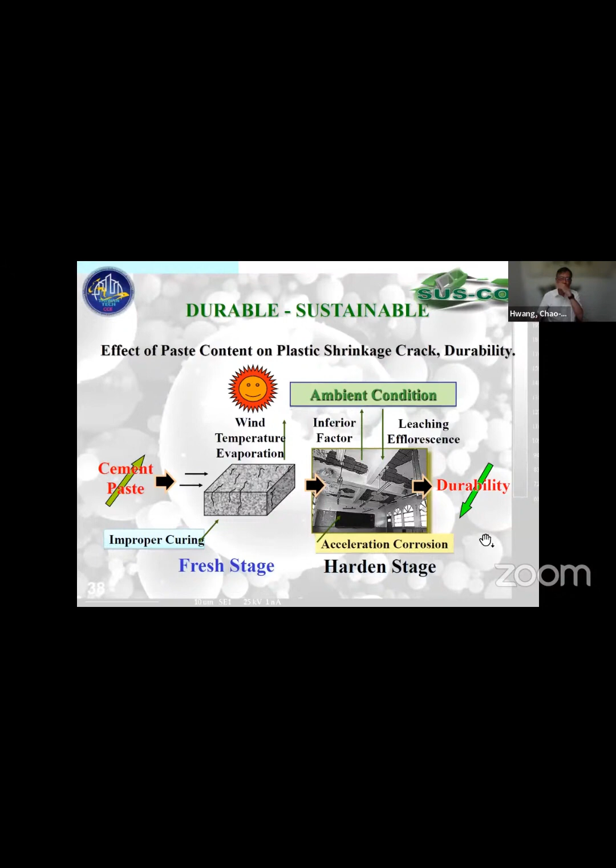Concrete with a large amount of coal ash. In Taiwan, it is already deemed green concrete, with 50% less cement for the same strength, and controlled low strength material with minimum cement for most backfilling jobs and road base projects. Next, please.

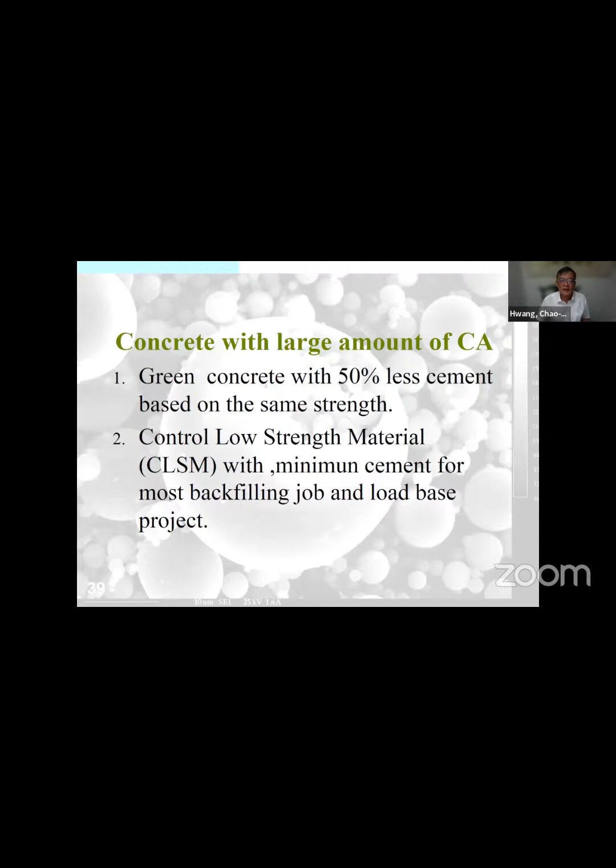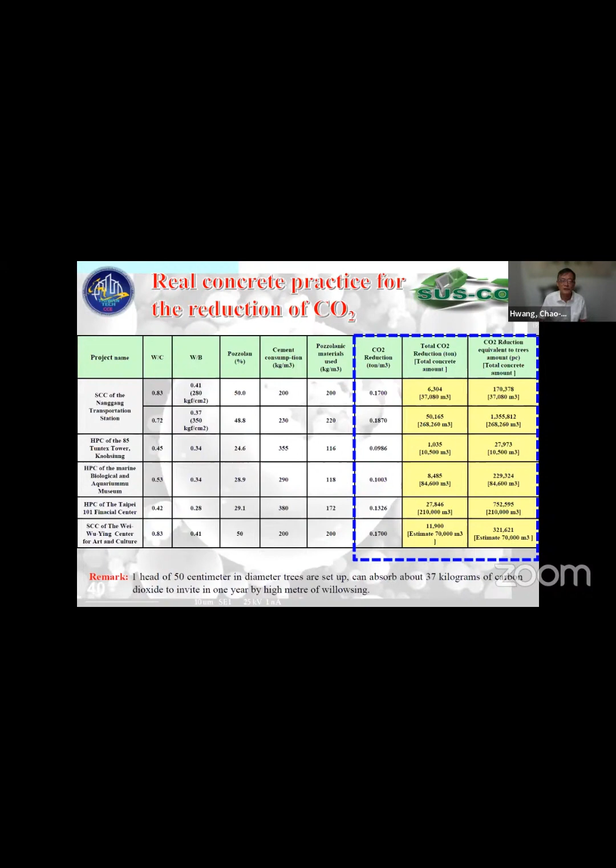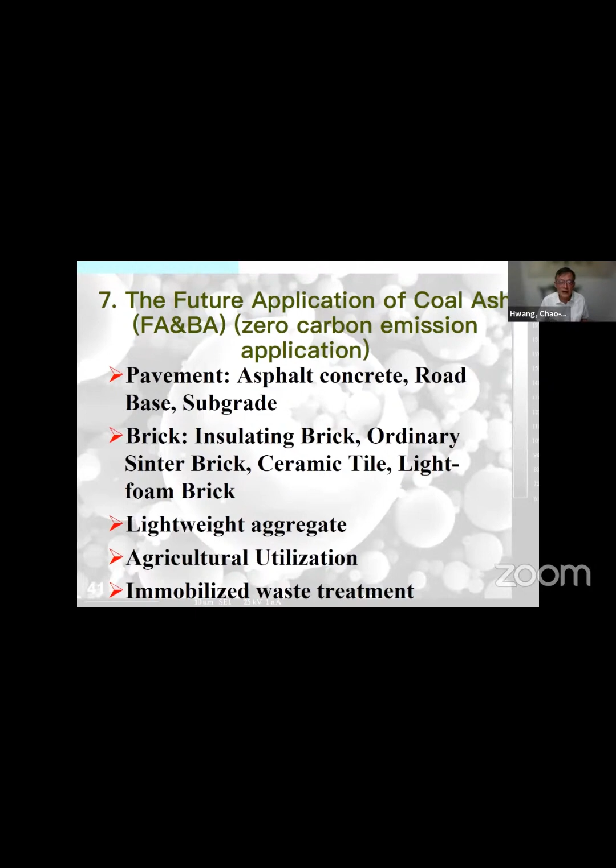So future applications of fly ash and bottom ash, zero carbon emission: pavement, asphalt concrete, road base, subgrade, brick, insulation brick, ordinary sintered brick and ceramic tile, lightweight foam brick, lightweight aggregate, agriculture, and also geopolymer. Next, please.

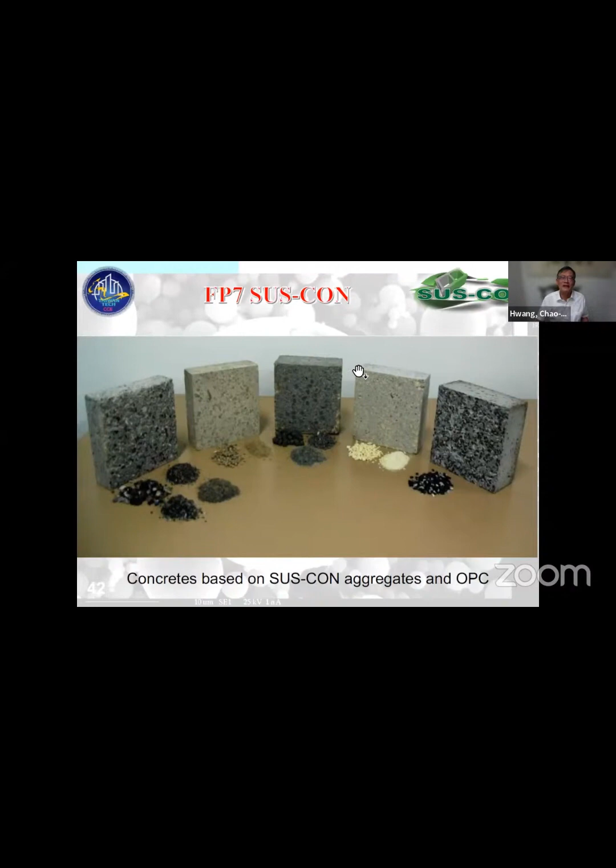Well, for the European community project we did, we used all kinds of waste. We used geopolymer as a binder, and bottom ash or waste material as aggregate. So that can be an example for future application in Indonesia. We used rubber tires, PU foam, and plastic material as aggregate. So that can be very, very useful.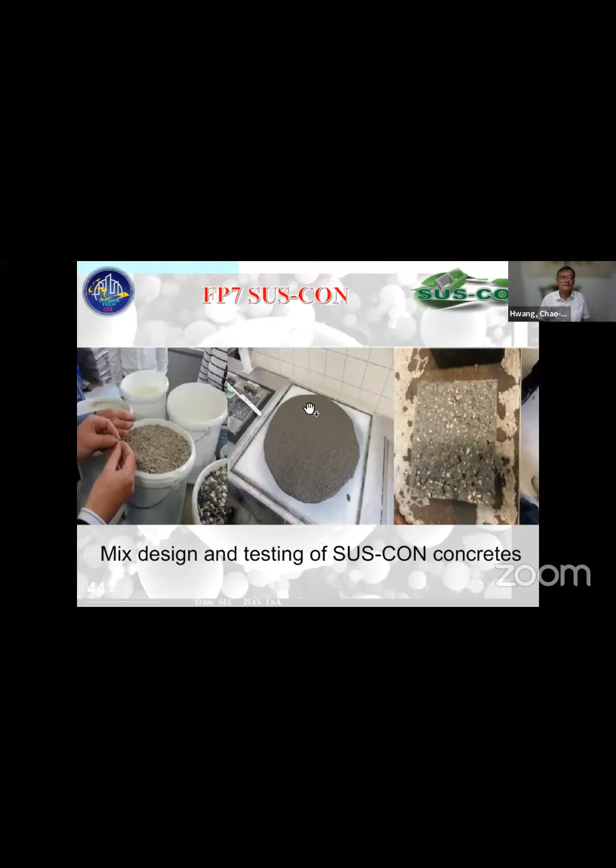Okay, next, please. So we use a geopolymer to produce SUS-CON, a sustainable concrete binder. Next, please. And this concrete is actually flooring. So you will see that we use all waste material, totally waste, during the design and testing of the SUS-CON concrete. Next, please.

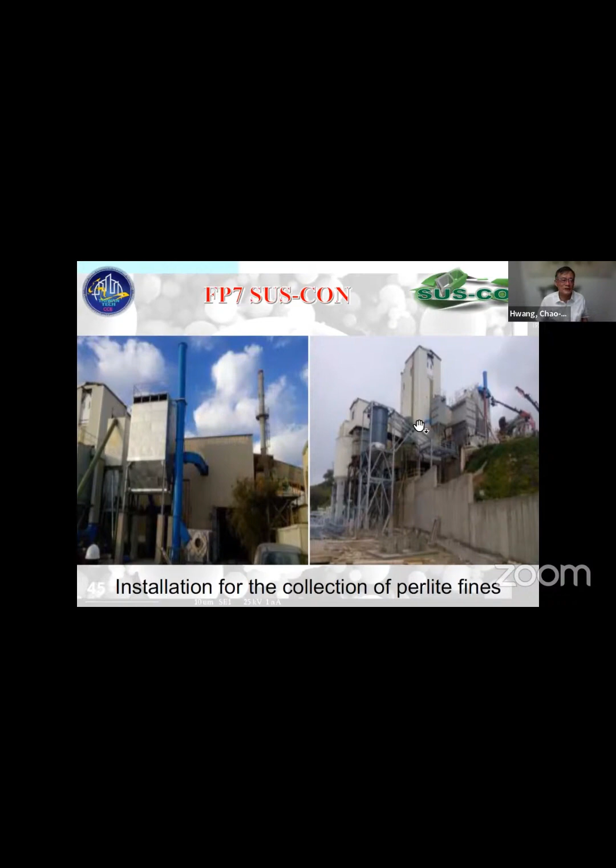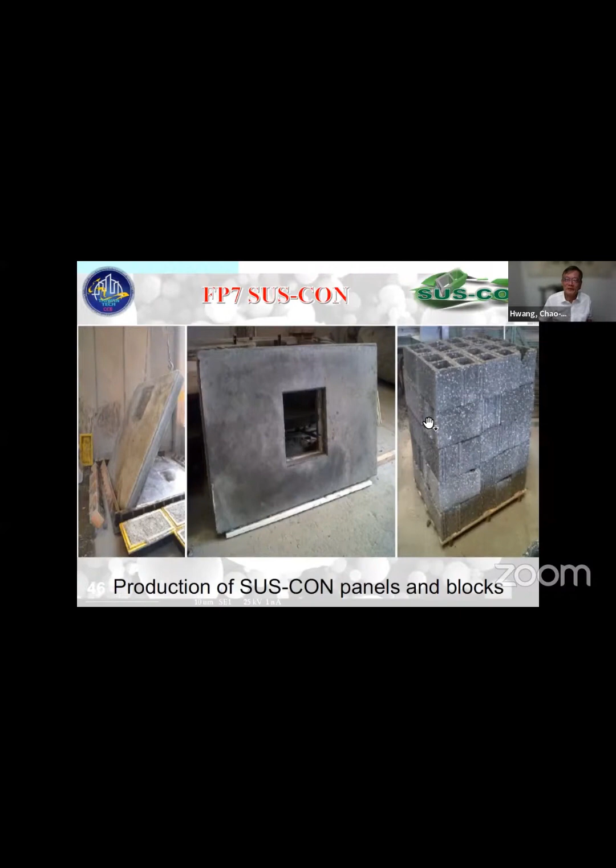So that's the plant we are doing. The European companies help industry, so when the project is finished, they deliver it to industry. Next, please. So we did some test panels. You will see this one is geopolymer. Look at the shape. So we can produce bricks and all other materials. Next, please. So that's a brick. Okay, next.

Conclusion and remarks. In the future, we need big data, a lot of data, so we can design concrete using artificial intelligence and IoT. So in response to the 4G era, build all this operation information. So we design and test, so we can establish a complete GIS information system, establish a digitalized fly ash and bottom ash data bank, and we can calculate carbon tax in the future. Next, please.

So we will have a sustainable Earth, energy saving, and carbon reduction. Just as Steve Jobs and Einstein did, use our imagination to create more application cases for the future. Thank you for your attention. And if there are any questions, I can answer them. Thank you very much for your attention.

Thank you, Professor Hwang. It's a very interesting presentation, and you shared a lot of experience. It's very valuable for us, and it's a great honor to have Professor Hwang here for discussion. So I open the session for questions. But first, I will read the question.

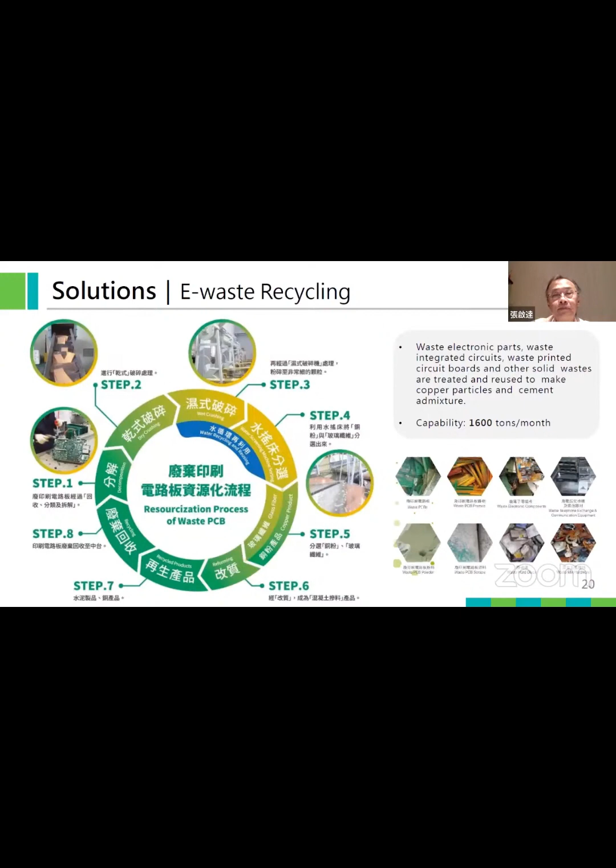Okay, thank you very much, Mr. Chang. So we go to the Q&A session, okay? I found many questions already about Mr. Chang's presentation. The first is from Mr. Sustanto Kusumo: how to separate the electronic waste in Taiwan, and is there any regulation that obligates the citizens for the separation? Yes, please, Mr. Chang.

I think Michael should interpret to Chinese, maybe. Or perhaps I can do the translation. Oh, please, Professor Liu. Thank you.

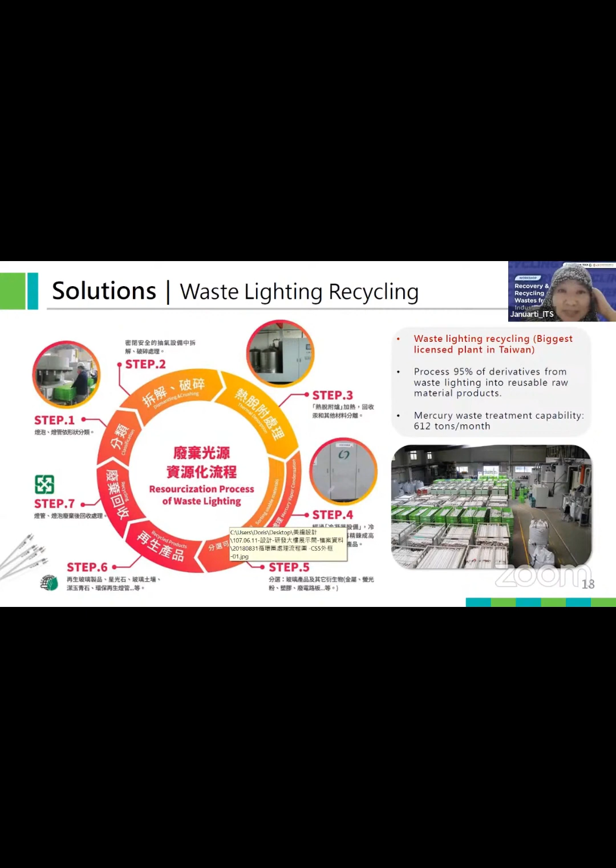almost the same things. They get the waste from the municipal city, from the Tokyo government, and they separate some materials like you have done, and they found that some materials are useful to make cement, and they produce eco cement. This is the first cement in the world made from municipal waste. My question is, are you going to do the same thing? It's quite interesting, and it's quite big money to make a cement industry from the waste. Thank you very much.

Maybe I can answer the question. I don't think Zhongtai is involved in making cement. I see.

It's more like upstream treating, trying to extract the usable, valuable resources from waste, particularly from the high value added e-waste.

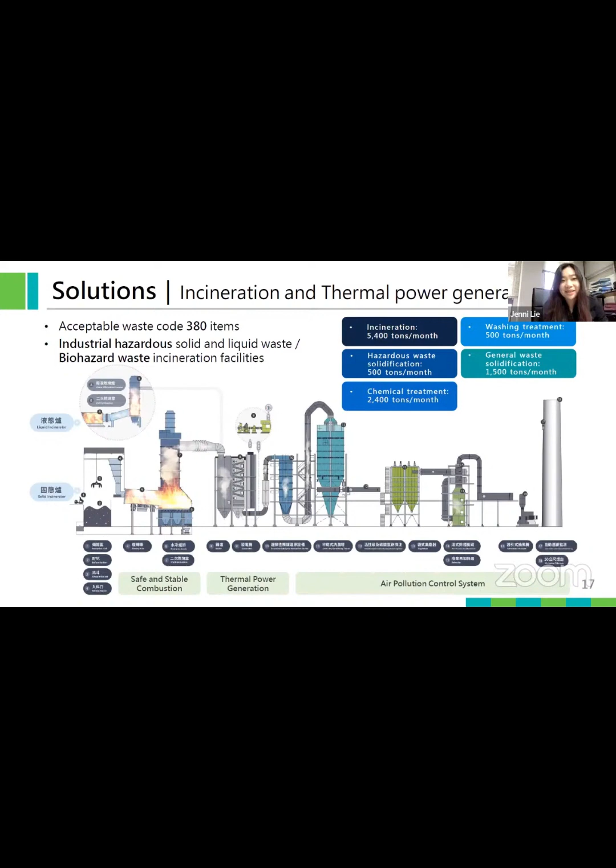That's the answer from Mr. Chang. Thank you very much, Professor Liu and Mr. Chang. I think all the questions have been answered. Thank you very much once again, Mr. Chang, for the very nice presentation and so much new information about the regulation and treatment process of waste in Taiwan. I will give it back to the host, Bu Wawa.